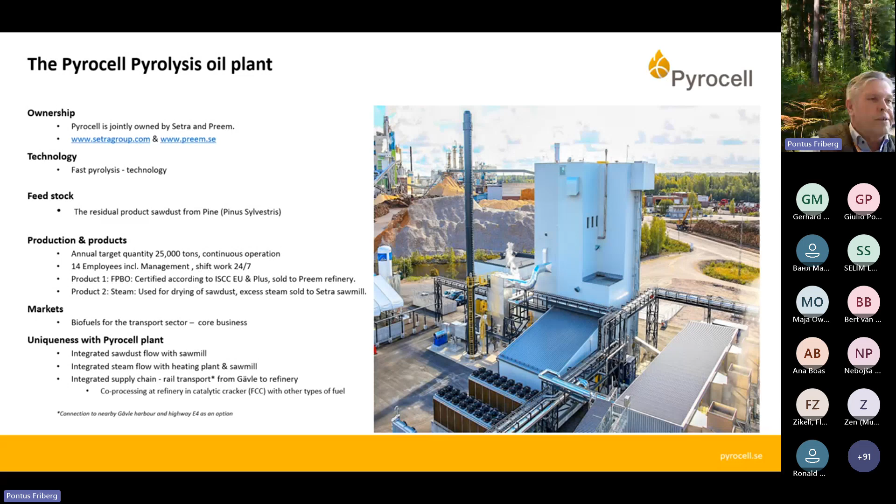Down there is a kind of co-processing via an FCC, a catalytic cracker. And so it's a blend with other types of fuel. That is what's done down there at the refinery. Yeah.

Experiences, yeah. On the right-hand side, you see the value chain. I'm not going to dig into that in detail at all. I would like to focus more on how we follow up the operation as regards safety and health, quality and yield, performance and compliance, and economy. I will tell you a few words about that on the next slide.

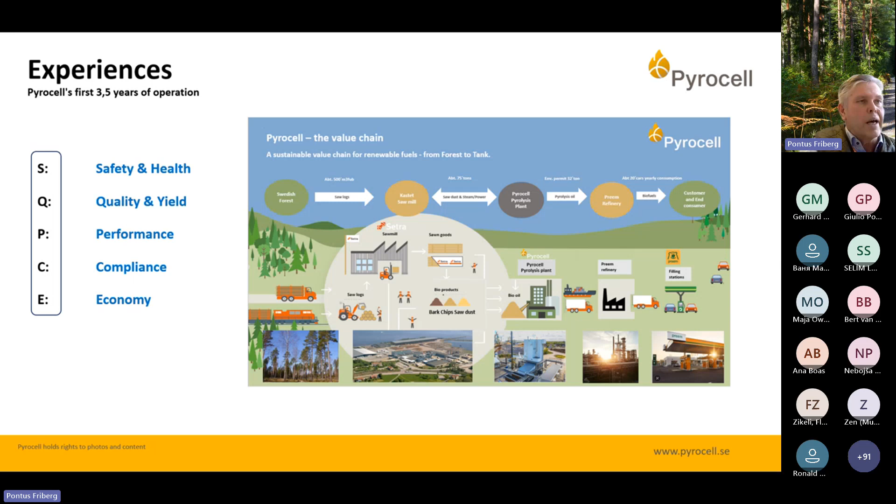And this is year to date, where we are after these 3.5 years of operation. It's important, and worth mentioning many times, safety and health. Knock on wood, but so far we have no incidents that have resulted in injury or absence. We count LTAs, lost time accidents, and so far we haven't had any. And also within the organization, healthy so far, no sick leave, in practice nothing, short or long.

That's good news. As regards quality and yield, we are on specification regarding the oil quality and sawdust, and who tells us what the specification is? Of course, that's the customer. In this case, it is Preem Refinery. So far we are on specification, and that's super important. No claims whatsoever. And as we sell energy, the energy yield is also super important.

And of course, when we bought this plant, we had expectations regarding the energy yield, but it seems that it's much better than the preliminary calculations. So it's far above what we expected, and that's good news as we sell, as I said, energy. We're not selling tons. It's megawatt hours we are selling.

That's my last slide, and I thank you for giving me the opportunity to talk a little about Pyrocell. Thank you.

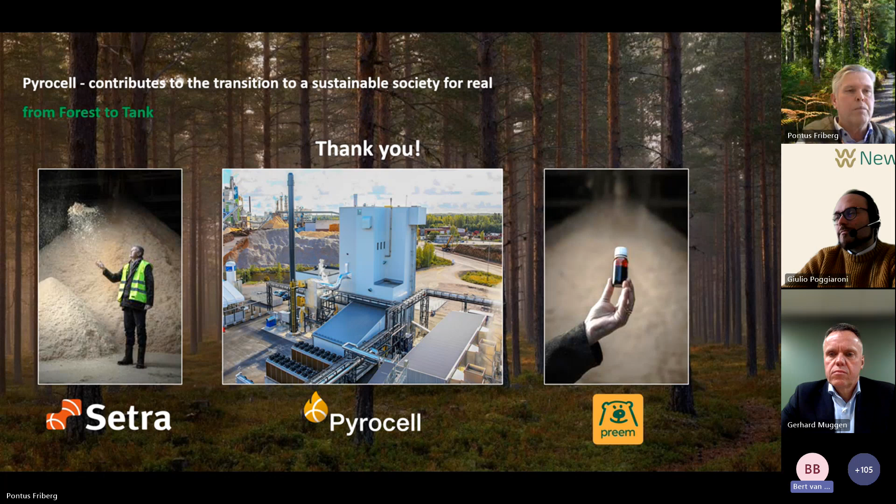Thanks a lot, Pontus. Very interesting presentation. Also very good to hear that you're on track with productivity and availability, and that the economics are according to expectation. One question is: do you have clogging problems in the reactor due to the use of wood sawdust? We had them in the beginning, but nowadays we don't have any big problems with that. No longer. Thank you.

Can you see any other questions, Giulio, by the way? Yes, there are a few others. What is the sawdust biochar utilization? What Pyrocell does with biochar management? Can you elaborate a little about the question? Oh yeah, just read the question.

So what do you do with the biochar? Okay, the biochar is burnt. If that is the question, we burn it, so we get heat from it. Okay, so you use it as a fuel to run your activities. Yeah. Okay, very clear. So non-condensable gases and biochar, that is burnt. It's burnt within the process. It's not in a separate installation. It's part of the overall process. Yeah. Okay.

What are the environmental impacts of fast pyrolysis compared to traditional fossil fuel processing? That's a general one. I think the presentation gave a kind of answer to that, and it's calculated together with Preem and others also that the emissions are reduced heavily, and as I said, up to 95-97% CO2 reduction as regards emissions. So it's a huge impact. Otherwise, noise is not an issue any longer. Some people are afraid of that, and also the smell, but we haven't had any complaints about noise or smell.

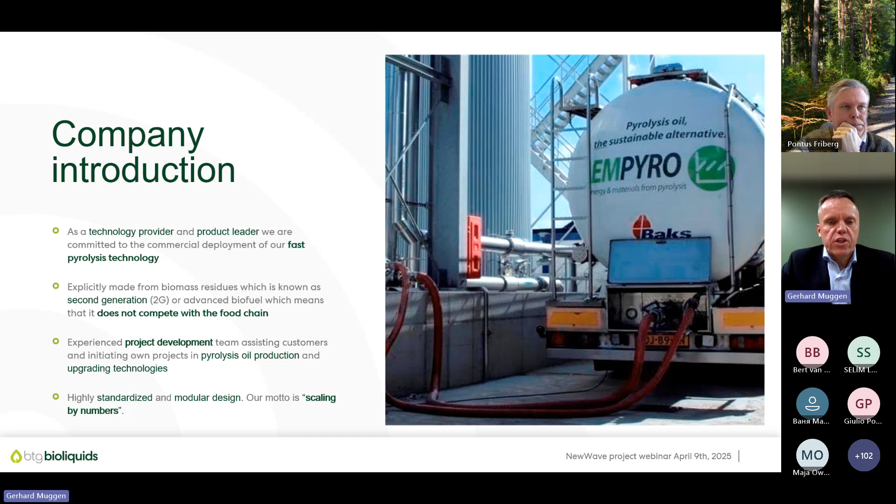So we are bringing together different parties of the value chain and shaping our own projects rather than waiting for companies doing it for us. So yes, of course, we will serve the biomass companies and the oil companies, but in parallel, we also develop our own projects, which I'll explain later. Last bullet, highly standardized and modular design. Our motto is scaling by numbers. What we are doing is coupling the biomass world with the, sorry.

I have some issues, guys, with my screen. I don't know what's happened. Sorry.

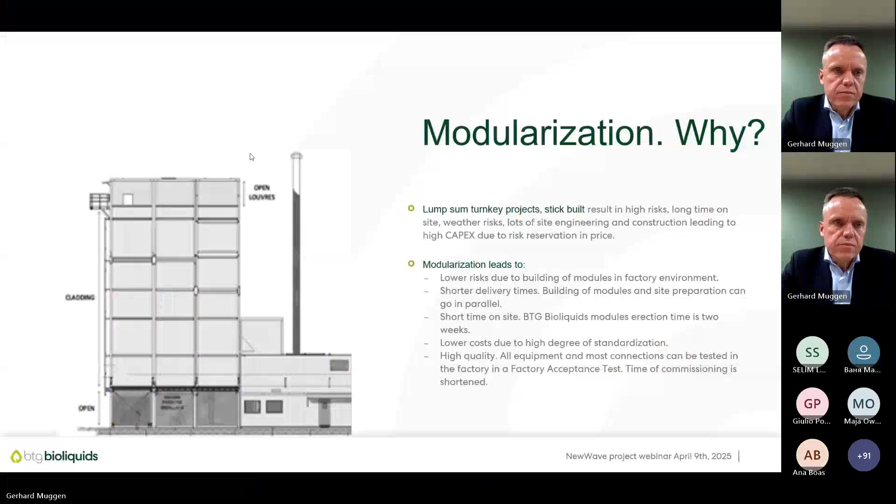Value logistic chains. We are coupling the biomass world with the petrochemical world. The biomass world is typically quite far from, let's say, the industry. And we believe it's very important that you're connecting these worlds with a liquid. The advantage of a liquid is you can transport it and you can store it and use it anytime you like. That's a very important advantage of a liquid.

Oh my goodness. My computer stops every time. Sorry for this. We checked it before, but

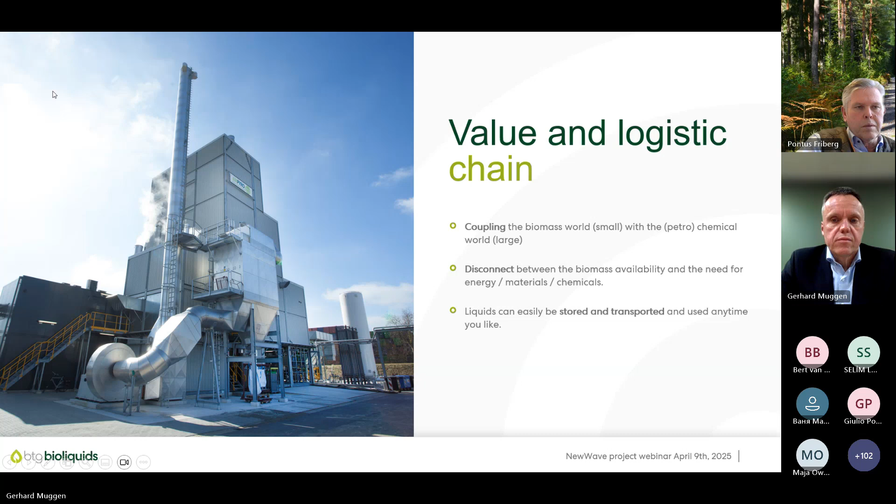Modularization. Why is it important to modularize? If you look to the market, you can see that lump sum turnkey stick-built projects result in a very high risk, long time on site, weather risks, and lots of site engineering and construction, leading to high capex due to the risk reservation in the price. Especially in the US, you see enormous prices on lump sum EPC projects. There are, of course, considerable risks, but when using modularization, you're really reducing the risks, which is a big advantage.

Because what you're doing is lowering your risk by building modules in a factory environment rather than building on site. Short delivery times, because the building of the modules and the site preparation can go in parallel. Time on site is very short. Pontus didn't mention it in his presentation, but if you look to the erection of the plant, the erection of the modules, we can do it within 2 weeks. That's been demonstrated first in Empyro, then at GFN in Finland, and also at Pyrocell in Sweden.

Third bullet, lower costs due to the high degree of standardization. The typical scenario in the petrochemical world is larger scale. We strongly believe that if you standardize properly, you can easily reduce the costs rather than building huge equipment. Another big advantage is if you bring the pyrolysis plant to the biomass, the transportation costs of the biomass are very low, resulting in a low price of the pyrolysis oil.

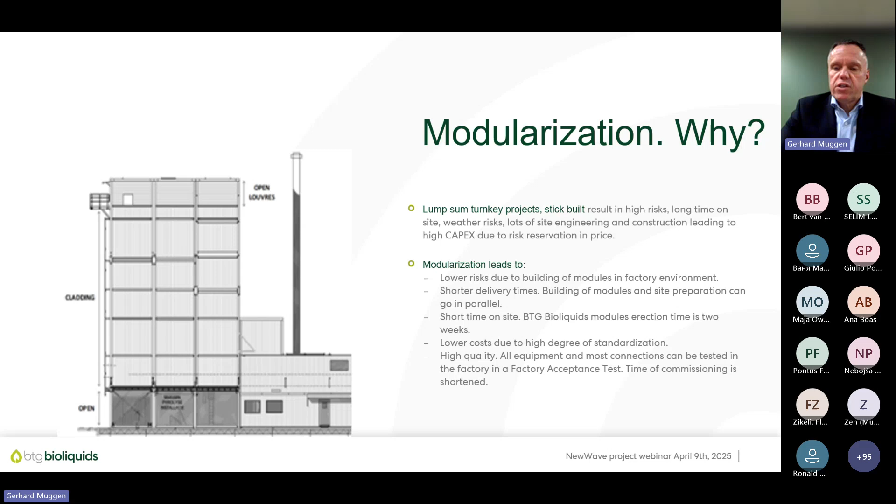High quality. All equipment and most connections can be tested in a factory acceptance test, so the time of commissioning is shortened. Proven technology means less risk. We have been producing more than 175,000 tons of pyrolysis oil in 3 different sites. The first plant, Empyro, as Bert already told, cost a lot of effort to get running. To give you an impression, in the first year of Empyro we produced around 1,000 tons of pyrolysis oil, and now 1,000 tons is produced in 2.5 weeks. Just to let you know how important it was that we had this first plant.

So we have learned all the lessons of Empyro in our plants in Finland and in Sweden. No scale-up risk. We have done it before. The last bullet, bank loans are possible with an export credit guarantee from Atradius. The project in Sweden has also been done with an Atradius guarantee. It's really reducing especially the interest rates of the customer.

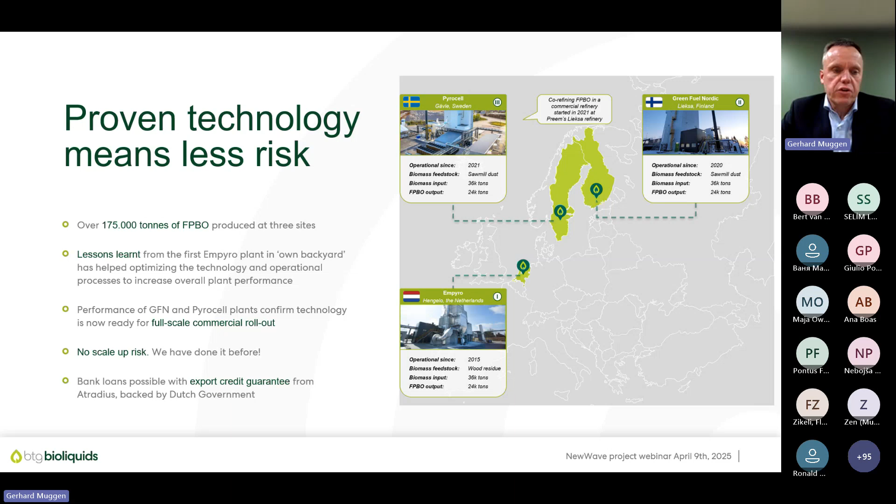Standardization. The good thing about a standard is we hardly need any engineering. So no pre-FEED, no FEED, no long periods of engineering. Everything is ready, especially when we talk about clean wood. If you go to more exotic types of biomass, then especially the pre-treatment of the biomass is an important one. But if you're looking to clean sawdust, then everything is done, and that's why we are ready for a full-scale commercial rollout.

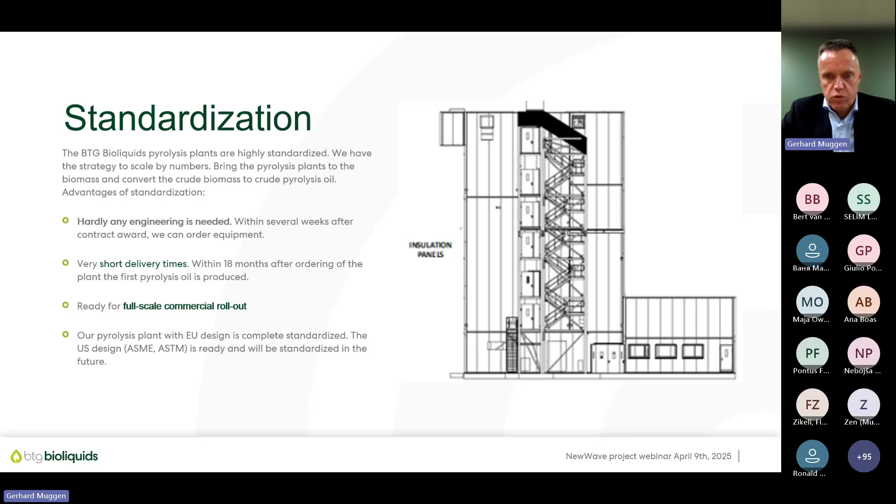Short delivery times: within 18 months, you will have the first oil. Last bullet, we are completely standardized in EU design. We have now finalized the US design as well. We're not standardized there, but at the moment we're selling 1 or 2 plants to the US or Canada. We will also standardize in this one.

The different applications of the pyrolysis oil. I'll go shortly through it because you know a lot, I suppose, and I would like to have some time for the last one, especially for the fractionation. Roughly speaking, you have 2 choices with fast pyrolysis bio oil. The first choice is to use the fast pyrolysis oil directly in existing infrastructure, as Pontus mentioned as well.

That's the first choice. You go to gasification, co-feeding to an FCC. That's the applications done by Pontus. Hydroprocessing, combustion and heating. Combustion heating is done in both Finland and in the Netherlands. You go to bulk chemicals, and that's for the direct use of the fast pyrolysis bio-oil.

The second choice is the fractionation of the pyrolysis oil, because you fractionate in the lignins and the sugars. The lignins can be again used for the gasification, co-feeding, hydroprocessing, combustion and heating, and bulk chemicals. And the sugars can be used for combustion and heating, bulk chemicals, and emulsification.

There are different ways, if you look, for example, to sustainable aviation fuel. In sustainable aviation fuel, some people, like for example BTG-NeXt, are using the complete pyrolysis oil to go to SAF. Other companies, like for example Alder, are fractionating the pyrolysis oil in 2 fractions, whereas the lignins are upgraded to SAF, and the sugars are used for other applications, like for example combustion and heating.

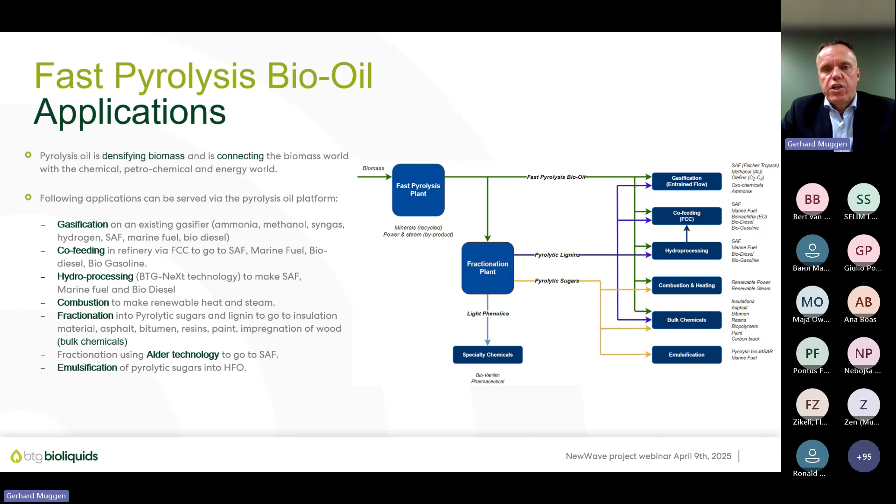Around 700 tons of pyrolysis oil have been gasified on a gasifier in Europe, and it was a big success. Very smooth operation, hardly any modification on the gasifier. So once again, it's a very interesting application due to the fact that you don't need to invest in a gasifier.

Biorefinery Twente. As mentioned in the beginning, we are not waiting for oil customers and biomass owners. We also develop our own projects. One of the examples is the Biorefinery Twente, where we're going to fractionate the pyrolysis oil in different fractions. You can see here a picture of Empyro on the left, and the 3D model of the fractionation plant. We are fractionating the pyrolysis oil in a 2-step conversion process to transform the different biomass resources into raw materials for biochemicals.

The first step, you transform the biomass into a pyrolysis oil, and the second step is to fractionate the pyrolysis oil in 2 fractions, the pyrolytic lignin and the pyrolytic sugars. Now, the first step, as I mentioned, is commercially proven. TRL9, as Pontus also explained, is commercial application. More than 175,000 tons of fast pyrolysis bio-oil have been produced in 3 different production sites.

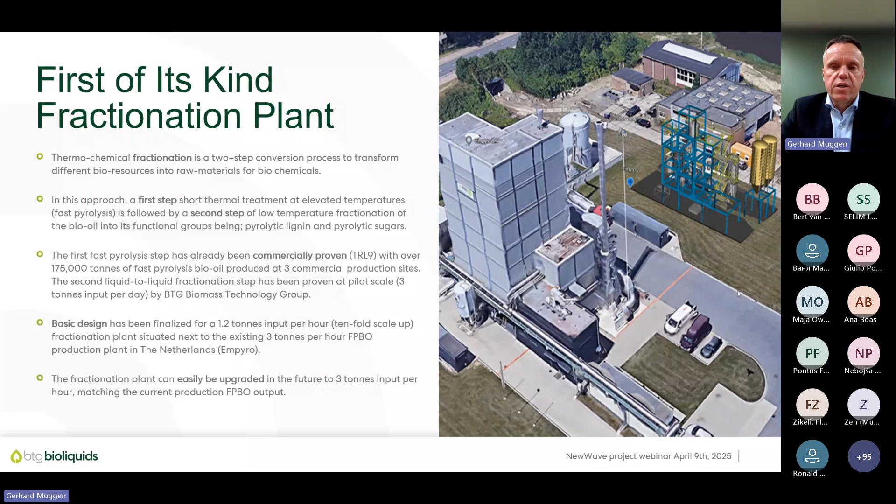The second step, liquid-to-liquid fractionation, has been proven at a pilot scale, 3 tons per day input, by BTG, Biomass Technology Group. We have now finalized the basic design for a 1.2 tons input per hour, a 10-fold scale-up fractionation plant, and we will locate it very close to the Empyro plant. In the future, the fractionation plant can easily be upgraded to a 3 tons per hour plant, matching the current production of a fast pyrolysis bio-oil unit. It makes a lot of sense to build these fractionation plants very close to an existing pyrolysis oil factory.

This is an overview. You can see on the left wood residues going in. The first step is the pyrolysis step. We'll do it in the existing Empyro plant. Proven technology at TRL9. And then we have several streams. The first stream is the steam, and we're selling this steam to Nobian, the salt factory. And 40% of the pyrolysis oil is used for the fractionation. You can see a picture of the fractionation plant there. And 60% of the pyrolysis oil will be used by Royal FrieslandCampina in a boiler application.

So in the fractionation unit, we're making the sugars, the phenolics, and the lignin. The lignin is used by Kingspan, you may know the company, for insulation materials, and the sugars, the phenolics, and the fast pyrolysis bio-oil are used by FrieslandCampina in its boiler. Now this fractionation unit is of course a first-of-a-kind plant. A lot of testing has been done, but it's a relatively simple process using existing and proven components.

I like to use this slide to come back a bit on the question of the yield. There was a question, what is the yield of this process? What we are seeing in plants in Finland and Sweden is that if you use clean sawdust, the mass yield can go up to around 72% from biomass to oil. If you go to other types of biomass, typical yields are, let's say, 60%, 65%.

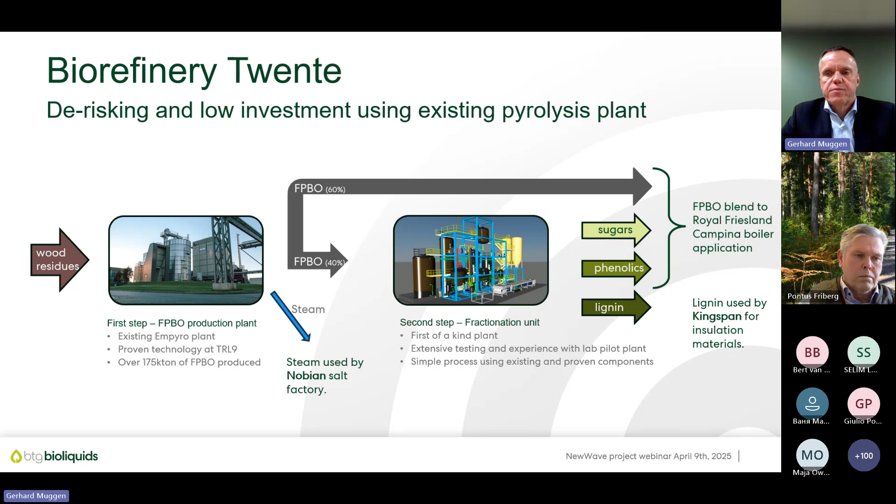Where we are with the status of the project: we will build this project via a sister company. The sister company name is Aurora, it's a sister company. And we build it at a scale of, as I said, 1.2 tons per hour next to the existing 3 tons per hour fast pyrolysis plant in Hengelo.

Indication of the funding is around 15 million euro total project cost. We have long-term offtake agreements being negotiated for the pyrolytic lignin with insulation company Kingspan, and with FrieslandCampina for the combined pyrolysis oil and pyrolytic sugars, and a continuation of the heat supply to the Nobian salt factory. FID is expected the third quarter of 2025. Exciting project, and we once again hope to finalize it in the coming time.

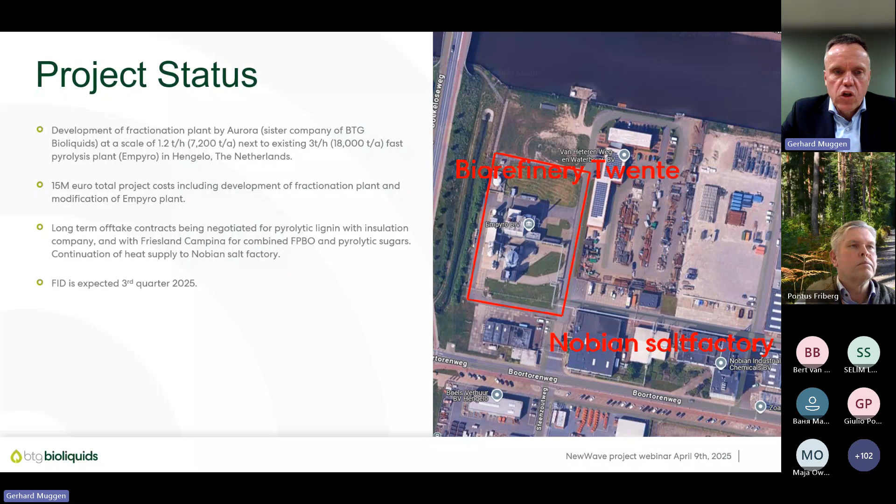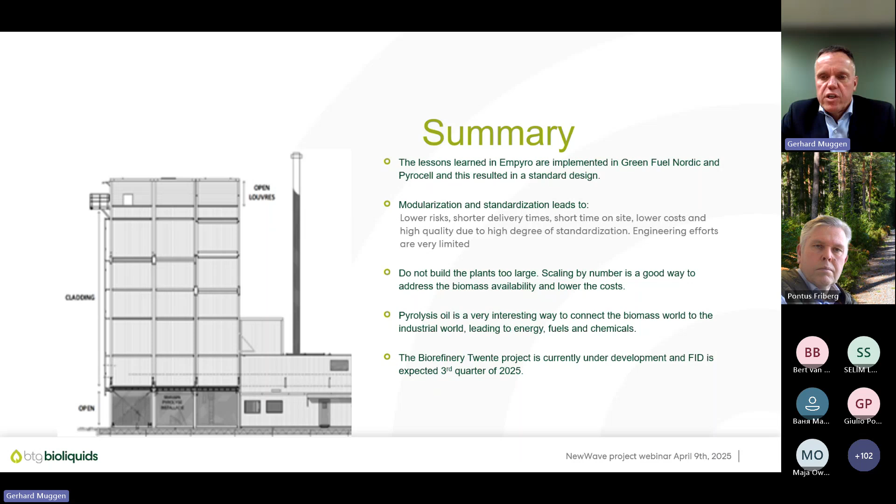Scaling by number is a good way to address the biomass availability and to lower the cost of the pyrolysis oil. Pyrolysis oil is a very interesting way to connect the biomass world to the industrial world, leading to energy, fuels and chemicals. And the last bullet, the Biorefinery Twente project is currently under development and FID is expected in the third quarter of 2025.